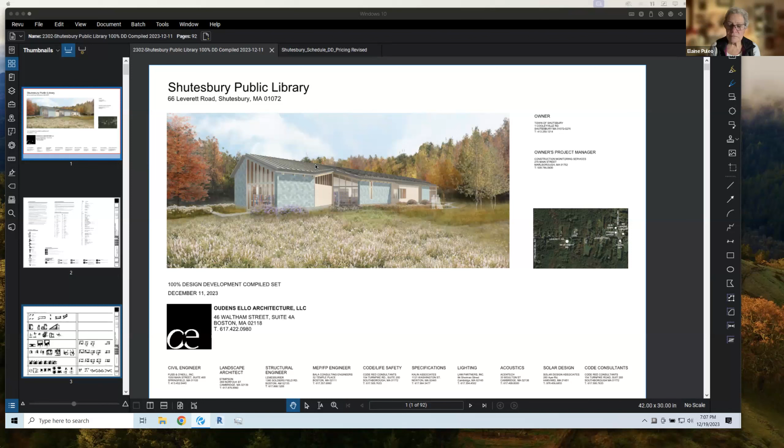So what I want to do here is really run through this page by page. I don't want to get too invested in each page, but I'm happy to stop for any questions. I expect you've all had a chance to review the majority of this, and you may have specific questions as I get to a certain page, so feel free to interrupt. In the interest of time, I want to do due diligence here, but I wouldn't want to make this a four-hour evening. So again, we have our cover page.

This includes all our consultants. The next couple of pages, the G sheets, have a lot of notation explanation, the drawing sheet abbreviations, general notes, and some code requirements. The next sheet has a lot of standard clearance, ADA, spatial requirements and clearances that we need to make sure we adhere to throughout the project. So that's something that we incorporate.

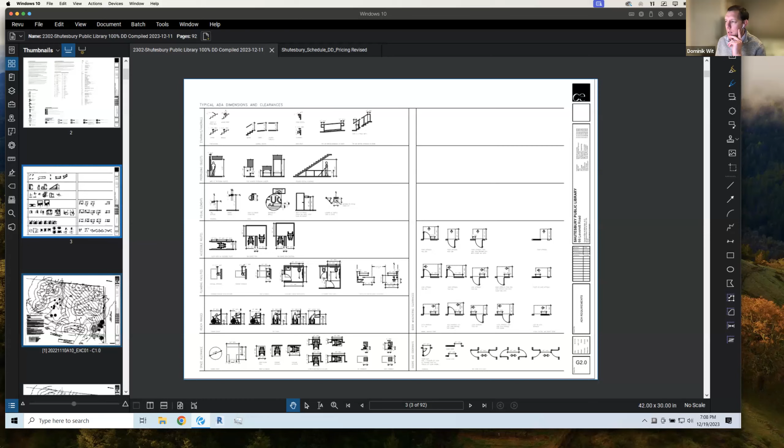The next page is the existing conditions plan with the limit of work line delineated. And that also includes straw wattles, which help erosion control downhill from the site. We also have sediment, a silt sock boundary around the limit of work, to contain erosion and make sure that any work going on doesn't let sediment run off during a rain event.

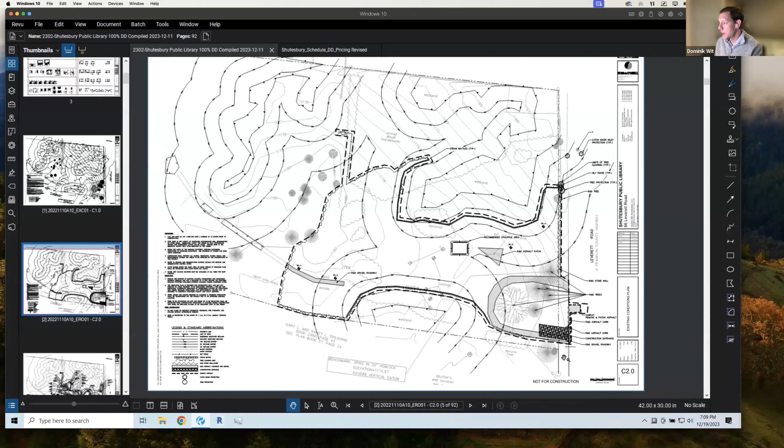We've also got a recommended stockpile area here, which is kind of where materials brought onto site, specifically landscape materials, are stockpiled and controlled. We have a construction entrance outlined here.

Now going into the site grading drainage plan. This has been tweaked a little bit from when you last saw it, but basically we have Leverett Road to the right. The entrance driveway has been shifted further to the east.

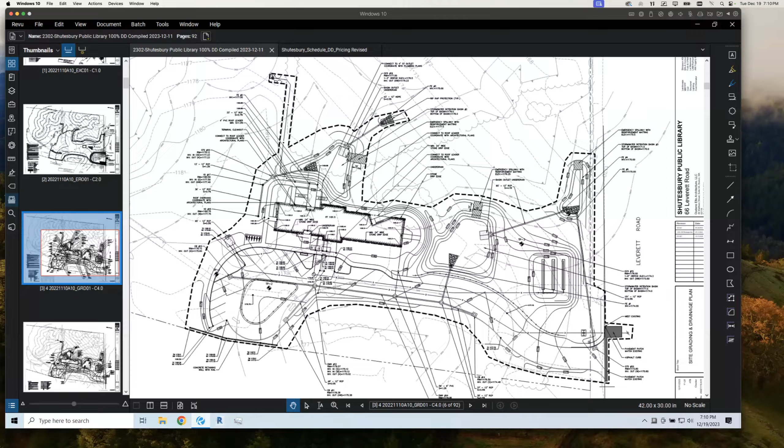So we have the entry drive that is negotiating the septic field, leading into a turnaround. We have a drop off here to the building. The stormwater management plan is really working around two major basins.

The intent here is to capture water from the site into a few drains. As I have my cursor at the higher level of the parking lot, it's going to be captured and then siphoned down to a level spreader into this basin. From there, it's going to be caught and drained off to this lower level spreader where the intent is really to control water and distribute it back into the wetlands and this portion of the site slowly. We're looking at capturing water at the entrance at Leverett as well and bringing it back to this drain I'm highlighting here.

Moving to the west side of the site, we have the well located on the western side here. Water that's captured here is going to be caught in this basin. There are some entry points to collect water at this location, and then again controlled and discharged at this level spreader here. The roof is also going to collect rainwater.

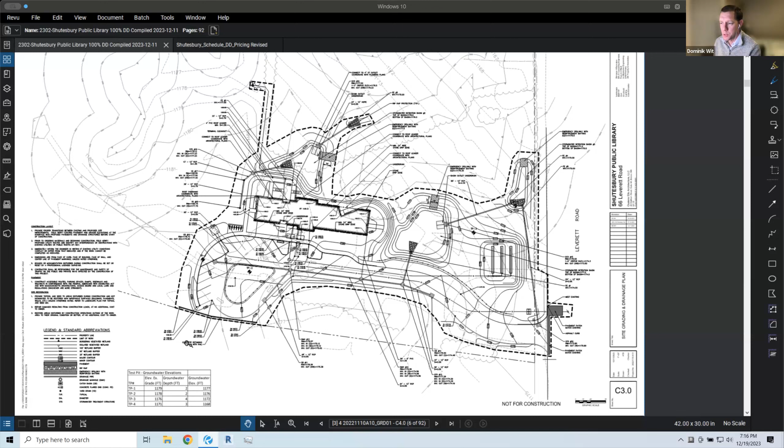Dominik, before you go on—one thing to mention about that retaining wall on that edge of the property: based on the size of the building, we think we're actually only obligated to provide 12 spaces to meet the 1 car for every 400 square feet. So we're currently showing 13, which means if we eliminate that last space, the easternmost parking space...

We think we can tighten up the overall driveway radius and pull further away from the property line on that side, or at least that would be our goal. I don't know if that's enough to eliminate the retaining wall altogether, but we would look at grading there to see if there's enough room to do that rather than having to build a small wall. There's a lot of expense in that wall.

I noticed it's got 5 feet of foundation buried under it, a lot of steel in it, so I would recommend getting rid of that space and doing what you're saying, Matt. Yeah, and that means we lose that space, but I think we can tighten up the driveway. Whether that's enough to get enough distance to get the grading to work, we'll have to see.

Hopefully it is. I don't know if you guys have talked about that yet with Fuss and O'Neill, but—yeah, it had been mentioned with Stimson, the landscape architects, and Fuss and O'Neill, as a strategy to relieve the need for that retaining wall.

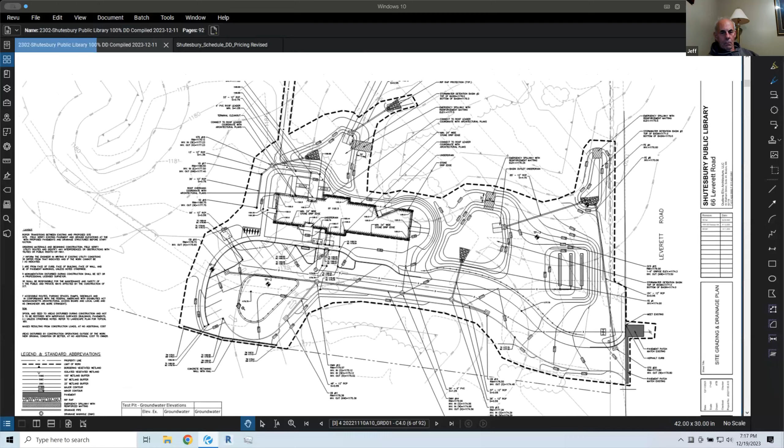Moving on, so the next plan is the site utility plan. We're seeing some of the same elements here, but this plan is outlining how the utilities are going to be brought into the site. We had two utilities priced: one was an underground conduit duct bank, which would bring electrical and telecom into the building with a below grade duct bank, and the second add-alt is to go with overhead poles.

So we would bring electrical and telephone in with overhead wires to the transformer, and then from there into the building. What would be the route if it was overhead? Overhead, we would bring it across to the east side. Got it. Yep, and I think we may need a pole—we still need to work out what that would look like, but the intent would be to bring it over to the east side to free up this side of the drive, walkway, and parking.

So that's really it for electrical service. You can see the limit of work captures what we'd need to tie in to the existing utilities across the street there.

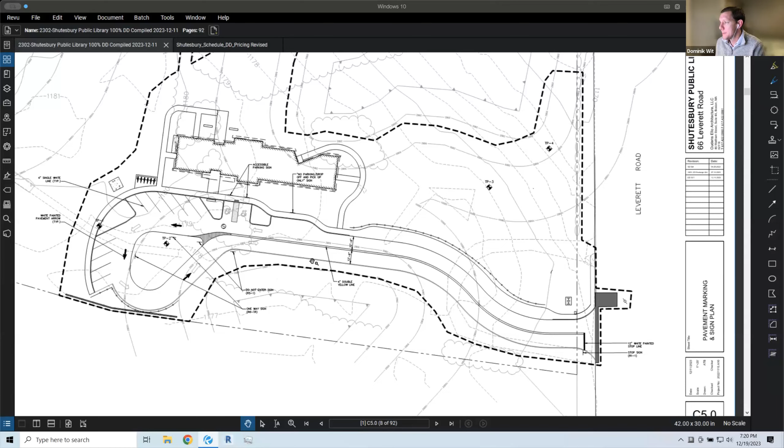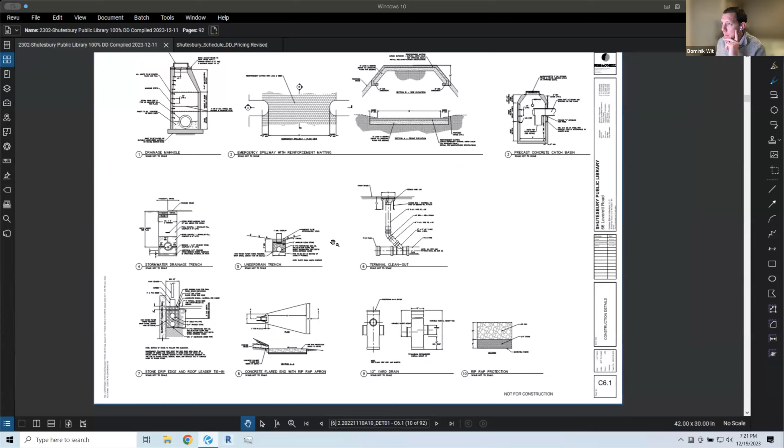This one I wanted to quickly highlight—this is the emergency spillway. Again, this is reinforced matting you'd see in the general vicinity of the basin on one side, where the water would spill over. And again, this will be overseeded.

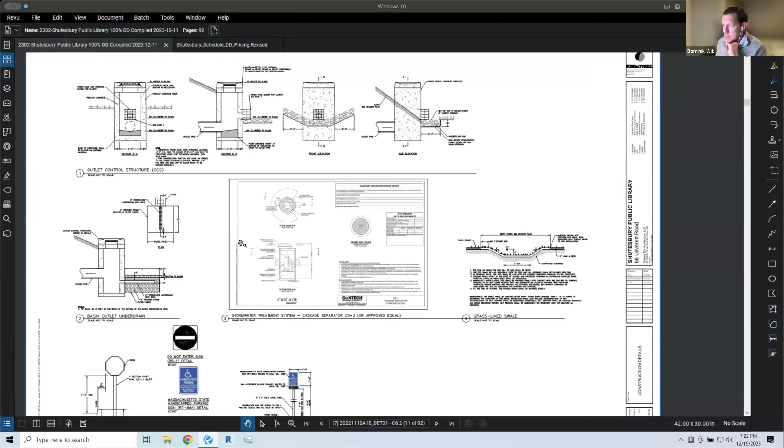The next detail page has additional details with outlet control structures. These we'd see at the basins where we collect water and then divert it to the level spreaders beyond the basins. I wanted to highlight this stormwater treatment system—we have it in two or three locations around the site, required because we're near wetlands. It's a sediment control device, like a manhole but with a filtration system inside. Because of the soil types on site and the surrounding wetlands we're discharging to, we need to clean the water and control sediment.

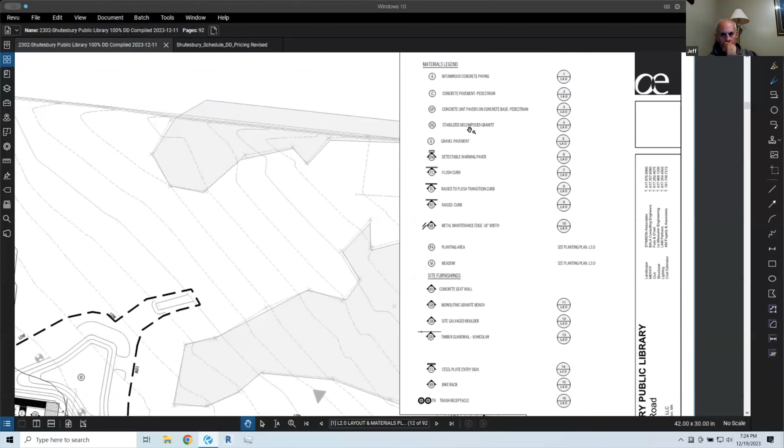That concludes the civil. Moving into landscape—this landscape plan really highlights materials: asphalt for the entry drive, concrete pathways, gravel for the entry walkway, and spillover parking with concrete block paving, and some fine grain gravel here—decomposed granite, so stabilized gravel or dust. So this is more the hardscape definition.

We do have a vehicular barrier required because of this retaining wall. This is an added cost and an additional element to the site that we may be able to remove if we can finagle this portion of the plan.

Moving on to the planting plan. Can I ask a question? Sure, can you blow that up again?

Around the back side of the parking, where it's kind of a half circle, is that a concrete sidewalk? Yes. Do we need that? We do, for accessibility—though you could do crushed stone instead. Maintenance is a consideration in the snow. We'll need ADA access to every parking stall. Could it be asphalt instead of concrete? Yeah, it could—that's a good question, we should ask our consultants. I'm just thinking about Norwell or Eastham, for instance—we don't have a sidewalk along the perimeter of the parking lot there. There's just an accessible path on the asphalt parking surface itself, so you can get from your car to the front door. To Jeff's point, we could probably simplify and eliminate that whole section of sidewalk and just have people walk on the driveway—it's a pretty low traffic spot.

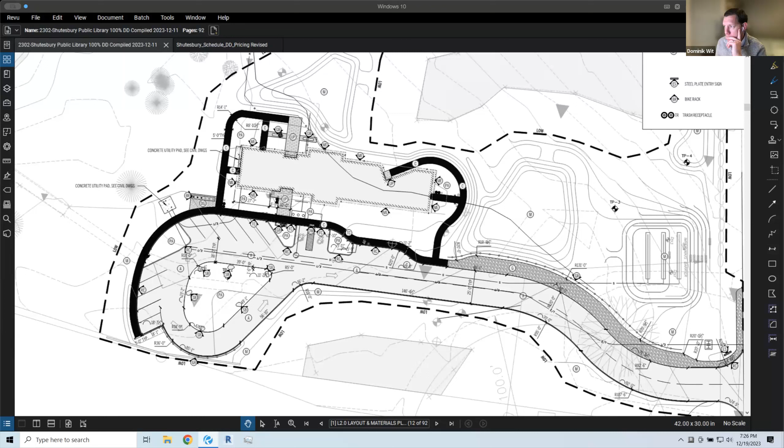But I would think we could probably eliminate some of that, if not all of that—potentially this, what I'm highlighting here. Yeah.

And are you blacktopping all of this? Yes. Yeah, asphalt's going to be the most cost-effective and easily maintained surface, I think, for you guys. It's plowable.

We've looked at pervious asphalt on projects, and typically it gets ruled out because of maintenance concerns. It has to be vacuumed at least once a year, otherwise the pores in the asphalt clog up and it basically becomes impervious. So asphalt tends to be the most effective and reasonably priced surface, and it meets ADA accessibility. That's the other thing—the lot will have to be accessible.

I also wanted to mention that we have a precast concrete curb. We do need a curb edge on this eastern side because of the way the stormwater is working, and grading and drainage needs to sheet to the east. So this is another element that we've included here, and we're looking at alternates for what that could be potentially.

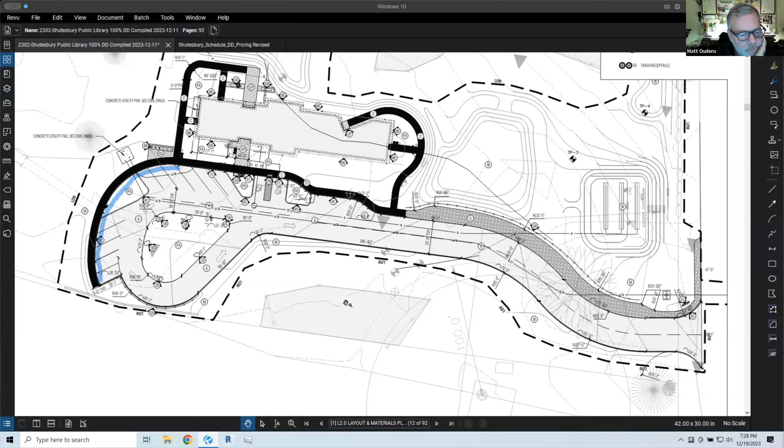We were holding on to granite initially, but that's a high spec material, so we've knocked it down to precast concrete. But potentially there are other ways that we can do this as well—could it be a Cape Cod berm? That's right, that's one of the things we're considering. Cape Cod berm is a little more vulnerable when you're plowing, but unlike precast or granite, it's relatively inexpensive to repair too.

So moving to the planting plan, starting with the grasses, we have 4 different types: New England wildflower mix, New England restoration mix, woodland mix, and a warm season grass mix. And they're distributed in different zones.

A key note here is that the retention basins are not able to be planted with any woody vegetation, so no trees or plantings, because they start to affect how the stormwater works. So these basins will be disguised—the modulation of the grading will be disguised with the grasses. I think maintenance will require mowing twice a year of these.

And then throughout, we're looking at planting trees, natives throughout, some screening happening here on the east side, some screening again of the septic field, and then trying to meet Conservation Commission remediation or mitigation strategies here.

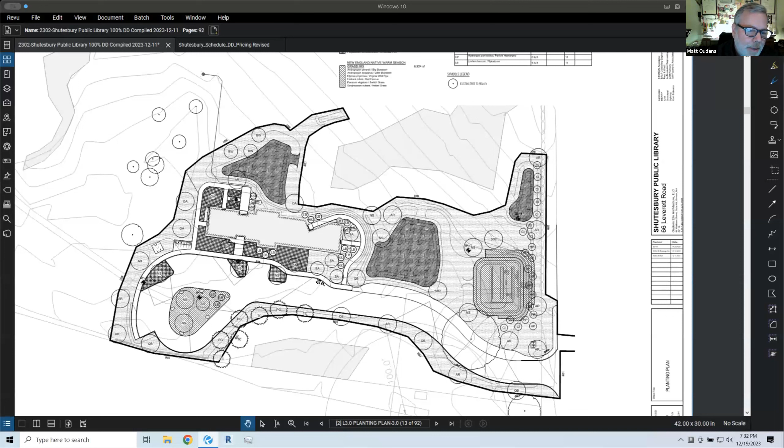One thing just to point out too, graphically, this drawing, because of the limit of work line, it sort of reads like there's a very strong division between what's being planted within the limit of work and what the vegetated condition is outside that limit of work. It won't be such a dramatic change—this makes it look like this is all very elaborately handled, and then beyond that it just drops off. I think the idea is that line blends, that the grasses planted in the limit of work area blend in with the buffer around the wetlands, so this is maybe a little bit of a misleading drawing in that sense.

So moving on, some details here, pretty generic conditions of how to treat new plantings—you need to excavate down to a prepared subgrade and then introduce compacted soils to facilitate establishment of the different plantings.

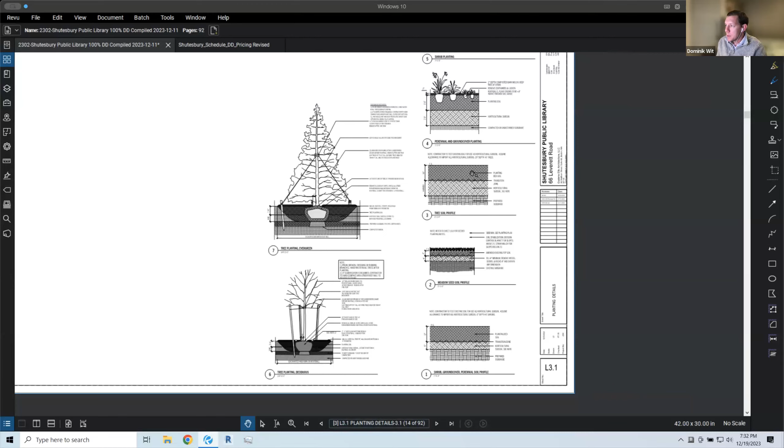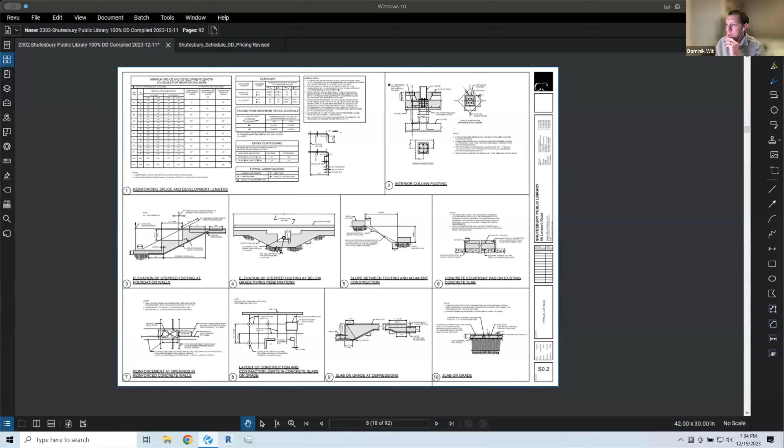Footings and foundation details. We will have a couple of pipe penetrations through footings for water lines, some of the utilities as well coming into the building below grade. Footing design.

And then we have some structural wall details here, ensuring that the shear walls that we have are constructed in a certain way. Some connection details.

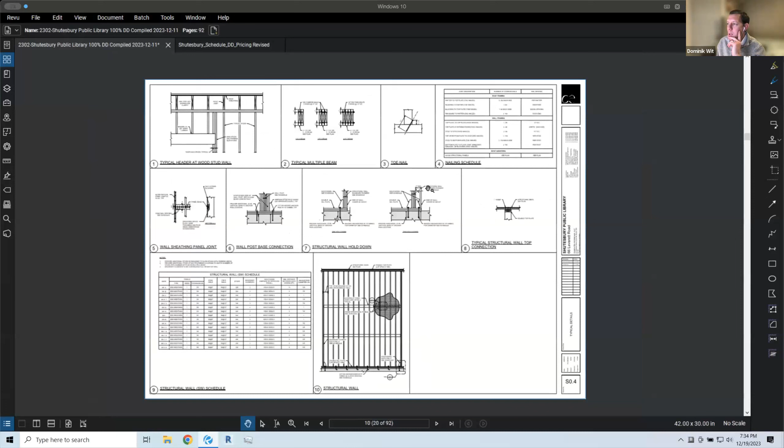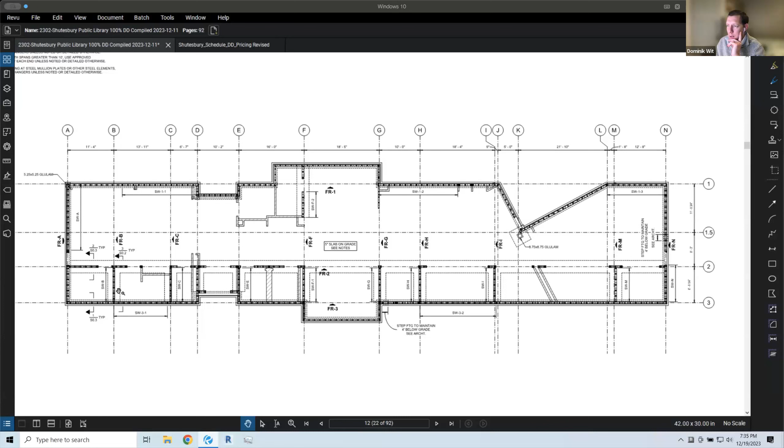The next plan is the wall framing, so you can see our shear conditions. Grid line 2 is really the spine of the building. This wall is a shear condition. We have some openings within that wall that are going to be spanned with LVLs, so we own some LVLs there for those spans. We have perpendicular shear conditions that are generally held on this eastern side of the building. This is also a shear wall here on F line.

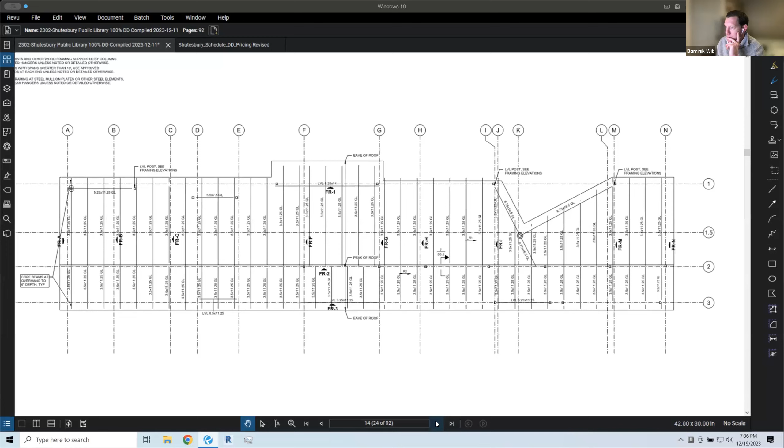And then roof framing. We have glulams throughout the ridge condition, which is the top portion of framing, and everything. The gable is framed off that. You can see some of the column conditions that we have here. And then we go into some column connections.

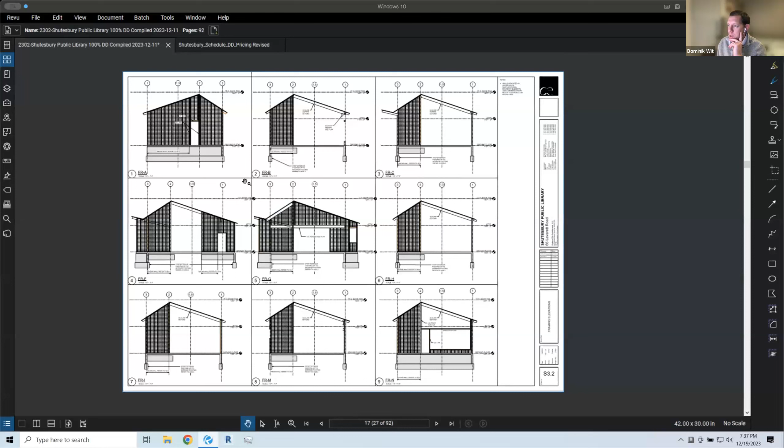Here we have some elevations. I'll kind of fly through them again. It's really outlining the framing requirements for the shear walls. You read the gable profile here and the framing requirements for different conditions throughout the building.

And a structural detail of the upturned roof. So again, these rafters are going to bear on the exterior envelope shear wall and tie into the roof rafter coming down that's holding the gable roof. The back span will bear into that shear wall running along grid line 2.

So moving into architecturals, not a lot has changed here. We did try to add and hold additional detailing. I think millwork, we really tried to kind of put a bit of work there and own some scope. But generally from our last review, there has not been a lot of revision here. So I'll try and fly through these a little bit.

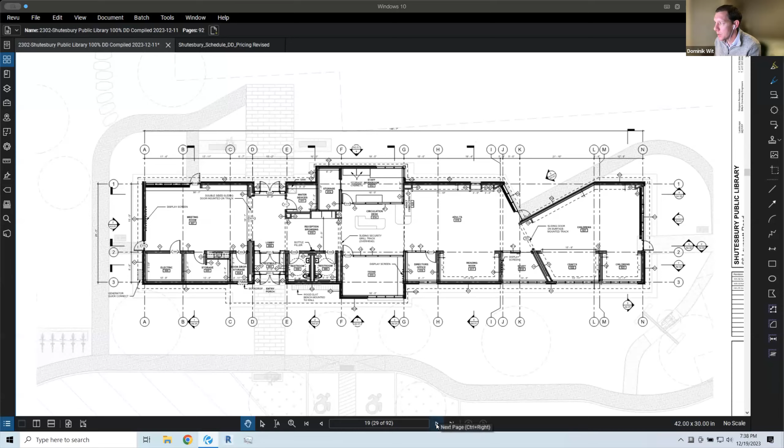I think you've got some contradictions on this drawing versus your reflected ceiling. So just check that over later. Sure, okay.

I think that will be the next. So we have roof and then RCP. This is the roof plan showing the zones for photovoltaic.

We're going to have a metal rain diverter at this notch condition, so that's going to collect rainwater sheeting down and off to either side. And we'll have the drip strip from the M grid line to the N, and then also between G and J here. We have 2 downspouts with a gutter condition, controlling rainwater to a couple of exit points here. We have that lobby exit and the meeting room exit.

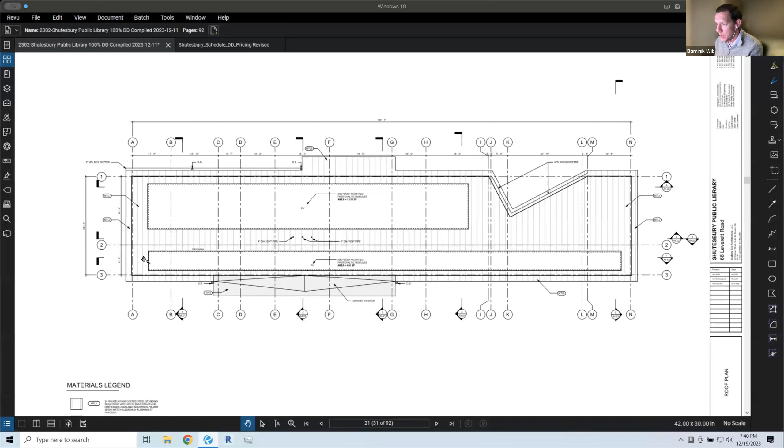Continuous PV zone on the eastern roof with the upturned roof. We have crickets here, cricketed roof insulation to divert water left and right to these downspouts.

This is the finish floor plan. So here, starting from children's, we have

resilient flooring in most of children's with a carpet inset. This can also be a carpet overlay, but we wanted to own some carpet here for the reading space in children's. Study also has resilient flooring. Adults, reading nook and directors has carpet. Teens and staff workroom and storage has resilient flooring.

And then we have tile from circulation desk, circulation, reception, browsing, library of things, and lobby. Restrooms have tile. The vestibule has a walk-off mat. And then we have resilient again in meeting room, storage, and book drop.

We will finish the concrete and electrical and water service. Yes, Brad.

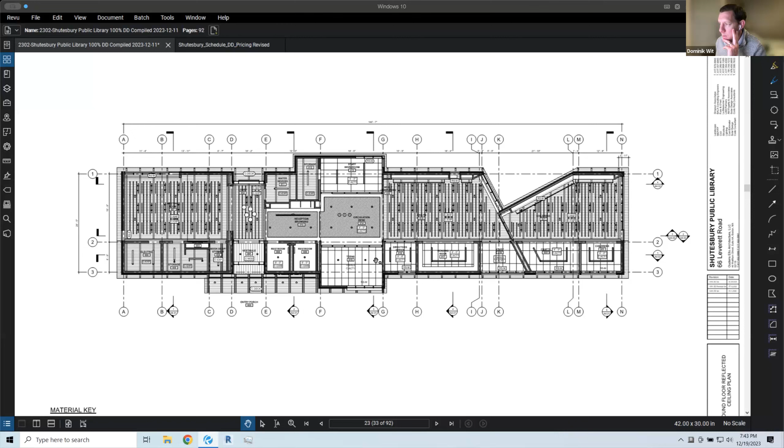In most of these zones, we have drywall, hard drywall in the restrooms. Again, teens and the study room will have a pitched wooden ceiling. The vestibule will also have a pitched wooden ceiling.

And then we have open to structure in these ancillary spaces here, electric, storage, and book drop. Didn't feel the need to have a ceiling there. We don't need it for code. Similarly, in water service and storage, open to decking above. The staff workroom will have acoustic ceiling tile.

You can also see here the acoustic baffles that take up the structural bay, so they run parallel to the structure. And in addition, we have track lighting.

So we're starting to represent here an own scope for lighting. We have track lighting in these open exposed ceilings, recessed downlights in reception and circulation, some linear in these other spaces.

The meeting room, we also have some wall grazing, articulated lighting, and we are owning some decorative suspended fixtures in the lobby. I think Brad has a question.

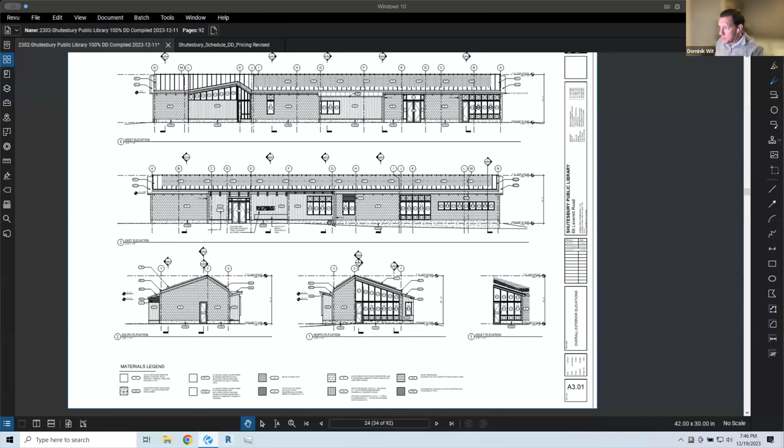Metal standing seam roof, and there'll be metal trim associated with that roof edge condition. Exposed wood decking, underside of eaves.

And the water table condition is concrete faced insulation, which continues around the whole envelope. You can see here the composition of windows and which are operable. We have awning windows throughout, giving the user flexibility in all rooms for natural ventilation opportunity.

Dale: So would Pella or a similar company be able to supply all of the windows for this project, or will you be looking for multiple suppliers on just the glass itself? All from Pella, including the vestibule. So the vestibule doors, all the door exterior and door conditions will be Pella as well.

And so in what color are you thinking of cladding this stuff? We are currently holding, so Pella is our basis for design, and we're working with them on an aluminum clad wood system. The interior would be wood, we often like a lighter maple finish on the interior, and the exterior will be aluminum clad. We're still working through what color choice we go with.

Yeah. This page is... they are... this page is taking a second to load. Hang on here. Oh, it woke up, apologies. This must be a heavy page.

I may switch to a different presentation program. All right, there you go. It's all the hatches, probably. Yeah, hopefully it's just this sheet. I have this set on another program ready to go. Hopefully it plays nice for a second, but I'm ready to go with another program if we need.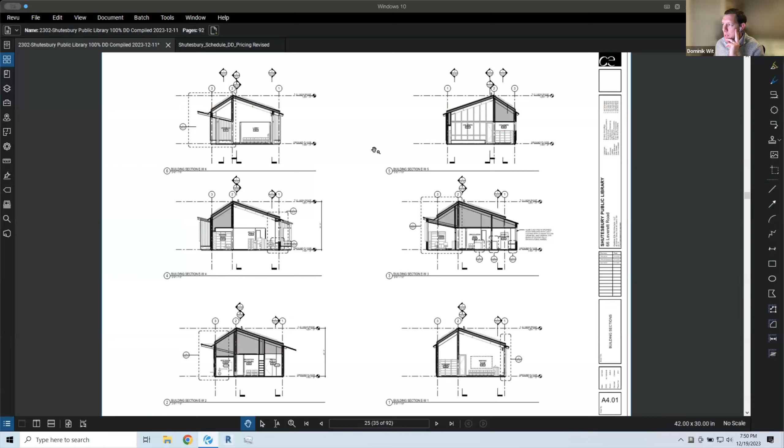So again, you have multiple sections through east and west, from the vestibule, moving to adults. Here we have reception, and then a view of children's above, which is taking a second to load. I wonder if it's just these two sheets. What I might do is switch though.

It's going to draw it for us. Yeah, okay. Can everybody see that? I've switched up. Yes. Sorry, I wasn't patient anymore.

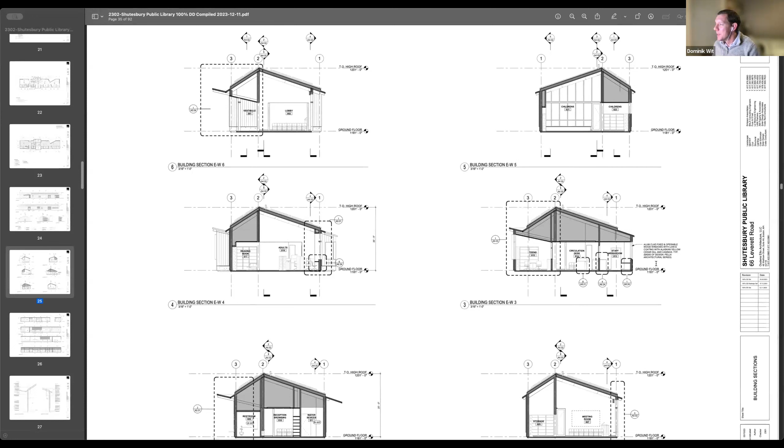So I just wanted to quickly show you teens here so you can see the relationship of the upturned ceiling condition, which matches the entry roof.

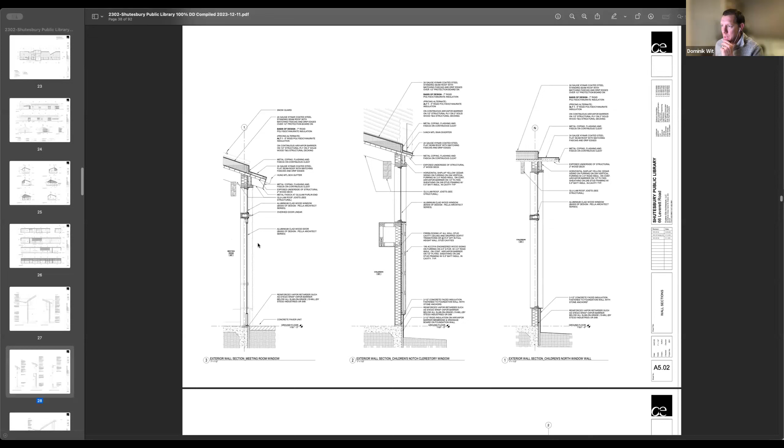This one on the left is through the meeting room. So this is going to be floor to ceiling window condition on the west side. This is the children's room where we have a shelving niche condition with a clerestory window. This is at the building at the notch condition here. So the relationship of the head of the window with the relative structure and how this all finishes.

And then another one at children's. This is the north wall of children's. This is a section through teens.

Yes, Stephen. Yes, so the section through teens, I was looking at that closely, and I'm trying to understand how the reverse roof section is insulated to be, say, compatible with the rest of the insulation. You've got the 7 inches of rigid coming down, and that stops. And then I'm not seeing much additional insulation.

Yes, at this location here. Right, yep. We're still reviewing this with Bala to make sure that we meet all the requirements here. So this is something that we're still looking at.

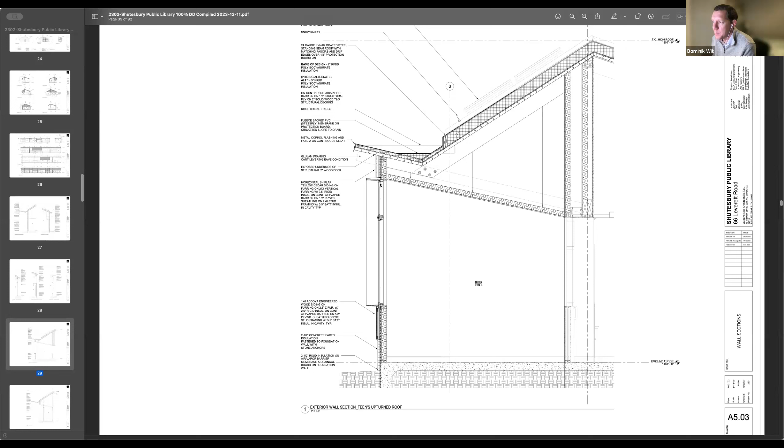This is the vestibule section. You have the outer door and the inner door to create the vestibule. We're finishing the ceiling with an upturned condition that's matching the porch roof, the upturned roof that you see here.

Can you review the amount of insulation you've got in there? You're running all your water piping through that cavity above those doors, and I'm concerned about that. If you look at your plumbing drawing, that's where all your... we had a problem at UMass where we always froze the damn pipes right through there. Yep, no problem.

That plenum space is gonna be conditioned the same as any other space that's under the roof, right? The thermal envelope is the roof and the walls. So anything below the roof is gonna be the same kind of thermal condition, whether it's in that space or out in the public space, from a thermal performance standpoint. Our concern was that lots of people coming into the vestibule get super cold when it's like 5 degrees outside.

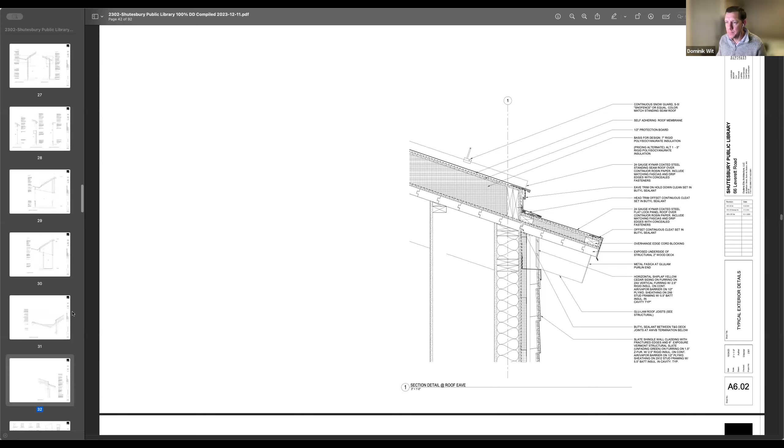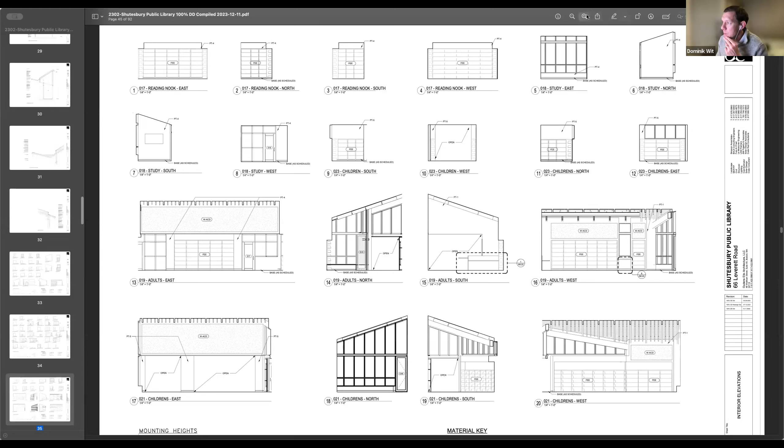We have the adults room. Some cleanup on some of these drawings - on this one here has already happened. Again, acoustic drywall in these upper portions of adults and children's. You can see wall shelving, window assemblies. This is the condition of the study carrel on the west wall, tucked in between wall shelving with a nice tall glaze condition there.

Again, just to orientate you as well, I skipped over this - we have obviously material keys down low here, and then all the device mounting heights. Self-explanatory, but we key them at the bottom of the page, and that gives you a good resource of where those need to be installed. And again, some children's spaces at the end here.

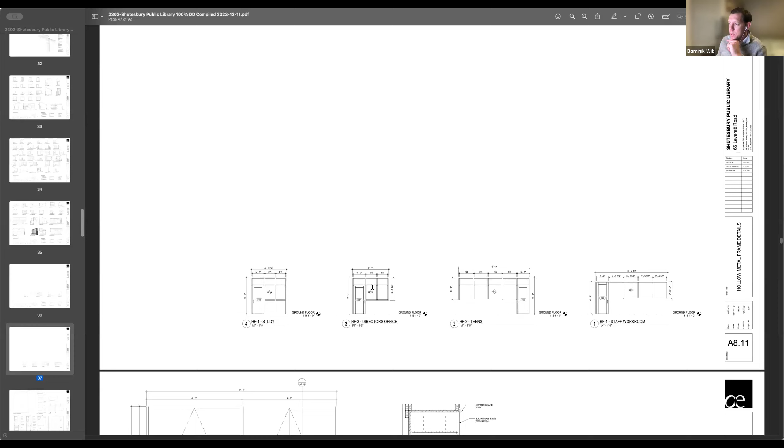The next sheet is documenting our interior glazing. We're working with Metro Wall, who we are using as basis for design here. There's going to be some revisions about where we divide our mullion system here, so we're still working through that. But we give a page specific to interior glazing.

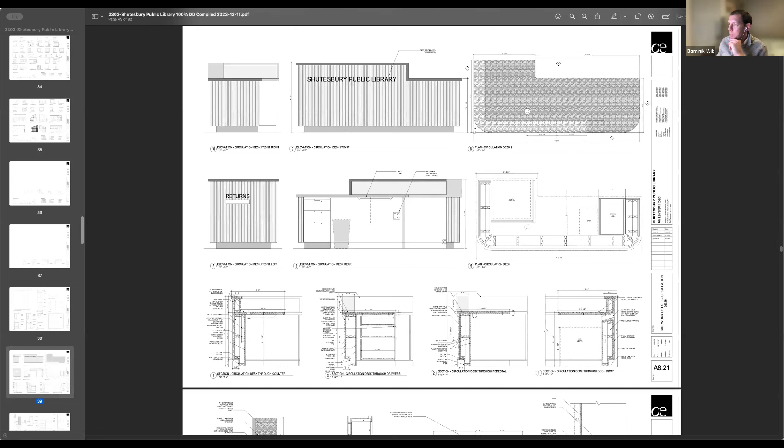The circulation desk is detailed on this next page. So this is a plan, and from that you can then refer to elevations on all 4 sides. We also have a below counter plan cut, which highlights what's happening under the counter. So on this side here, we have the book cart, and books will be able to be returned through a book slot on this side, above this book cart. That way staff can remove this book cart this way, while still allowing the staff member to sit here. And we have drawers over here.

We have a grommet currently located with an outlet below the counter. Again, Mary Anne, something we can fine tune as to your needs, so that you can have a computer station or a laptop or whatever devices on the counter. This circulation desk has 2 levels. There's kind of a privacy condition here, as you can see from this elevation.

So can I just ask one question? Well, it's probably going to be 3 or 4.

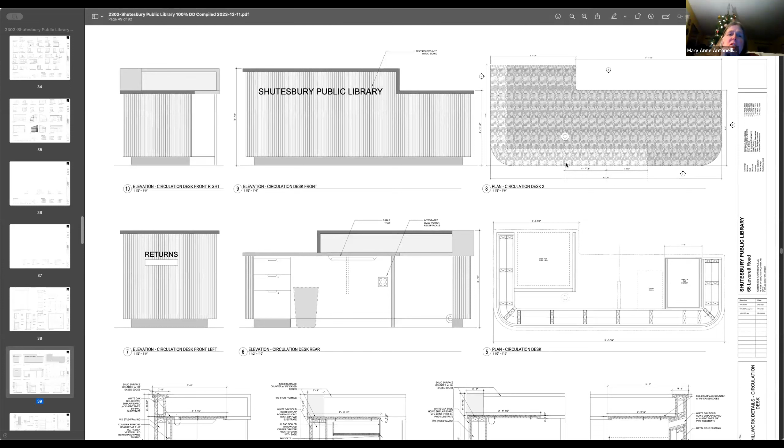So the circulation desk - people will come in and the return slot is on the side of the desk, not the front. The front of the desk is up higher at that point, and that slot could be on the front of the desk. I'm just thinking people have a hard time finding the return slot now, and if it's tucked around the side, but I guess they'll be walking directly towards the desk, won't they? That's right, yes.

I saw that Andrea had her hand up. So, yeah, I'm okay, yep.

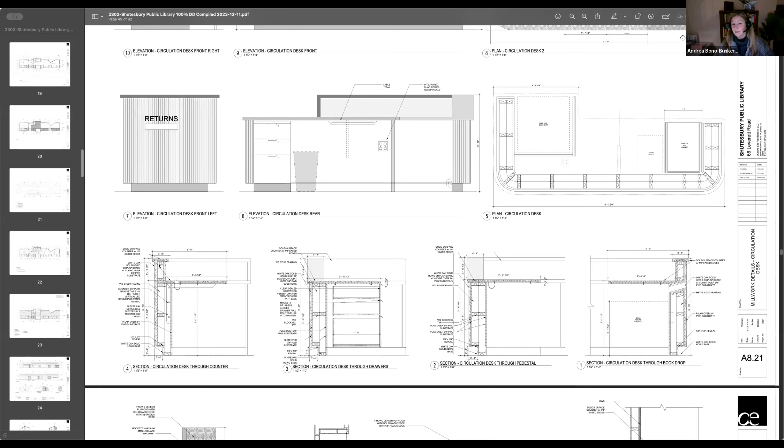So the privacy screen - is that like a lip above the surface of the counter? Yes, it's described here in this section, about 8 inches. It's an ergonomic nightmare for librarians and staff to lift books over that, so it should just be removed and be a straight countertop if possible. That sounds good, Andrea.

I just wanted to highlight that we have a low condition where we were initially thinking book transactions would happen, offering staff somewhere to put coffee mugs or pens. But we can easily revise this and have flat countertop throughout. Yes, because if they have a keyboard tray or anything on that desk and have to move diagonally, we don't want repetitive motions causing injury. So if we could remove it, that would be great.

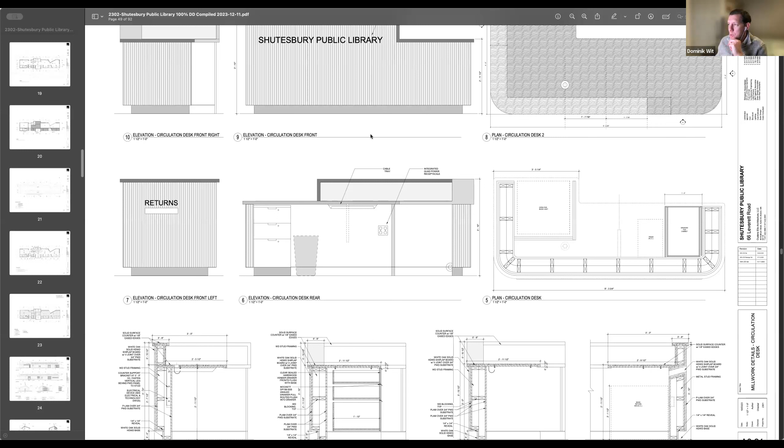One thing I forgot to mention to Andrea is that this is intended to be movable, not fastened to the ground. It won't be on casters, but it's something you can make sure to be able to move.

Moving on, we're also detailing the self-checkout station, which is next to the circulation desk. We also have a portion allocated for the print station, combined with the adult computer station - one will house a computer, the other is a flex seating station for a laptop device.

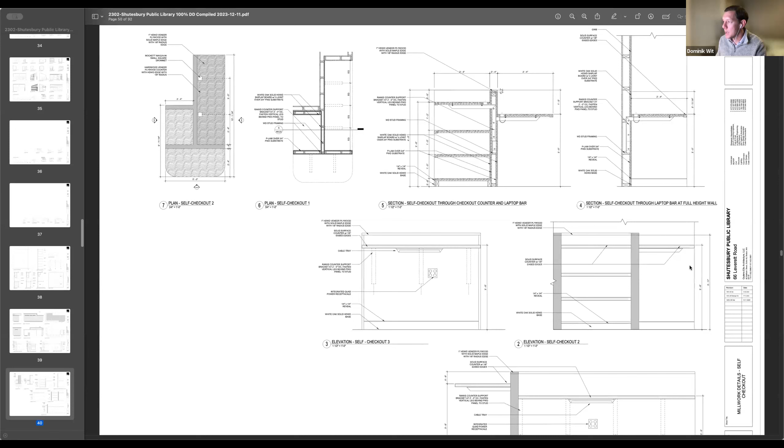Grommets - we're still working through this. I think we'll need a few more grommets here for cable management, so outlets below the counter can facilitate easy wire organization. We have storage, looking at the elevation here - this is looking at the printer station. There's a raised elevated condition, this crossing of solid gray you can see, giving somewhat of a privacy condition for people sitting at the adult computers.

Brad, I see you have a question. If you have grommets, is that to have cabling go through and be plugged in below? That's right. I wonder if that makes sense for a laptop, since laptops get plugged in, unplugged, and moved. That's right, it would be more cumbersome for the laptop station - more helpful for a stationary computer, desktop, or printer at self-checkout.

So we can revise that, potentially locate - I'm looking at the ability to do conduit runs in a back box. We don't have a lot of space; we were struggling, and I was initially reluctant to get a back box in here so we could have an outlet above the counter, but I can revisit this.

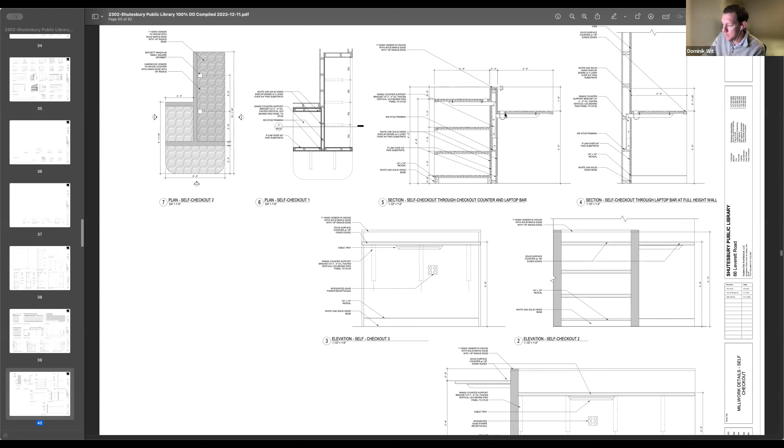So then moving on, we are detailing the library of things. I think the only addition here is we're looking a little bit more closely about how we could incorporate a coat hanger rail or rod that could simply sit in front of shelving to give you flexibility in off season.

Potentially you could remove that rod so that you have access to shelving behind. And then when you do want to display the life vests, you can put those rods back on. We need to do a little bit more investigation about what these coat rod brackets could be. If it's something that could latch in and latch out, it'd be great to remove them altogether if you're not hanging life vests, to clean up that wall. So that's kind of our thinking there.

This is all to be treated in millwork. So it looks to me like they extend out, so then there would be stuff underneath there and people would have life vests hanging over their head. Could those rods attach to the back wall so that the life vests are recessed? They could, not sticking out at all. Yep, so I think we could do that.

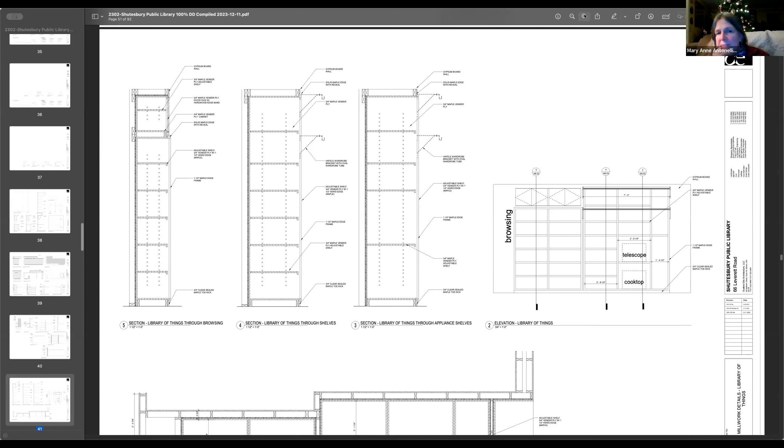I'm just zooming in here to the elevation, I think this would be an easier way to describe it. So currently they would be hanging here. The way we've detailed this is that these verticals are fixed and the shelving is adjustable so that in each one of these bays, the shelving can be put where you want. So what we might do is terminate that condition at this horizontal, and then above, we reconsider how we detail this. Potentially we have one vertical, we'll look at it, and then basically recess that rod.

Moving on. So we're kind of getting to the end of architecture. We have some exterior wall assembly details here for the different finishes - slate, wood, and an alternate stud cavity condition. And then again, interior partitions. I'm going to go through these fairly quickly.

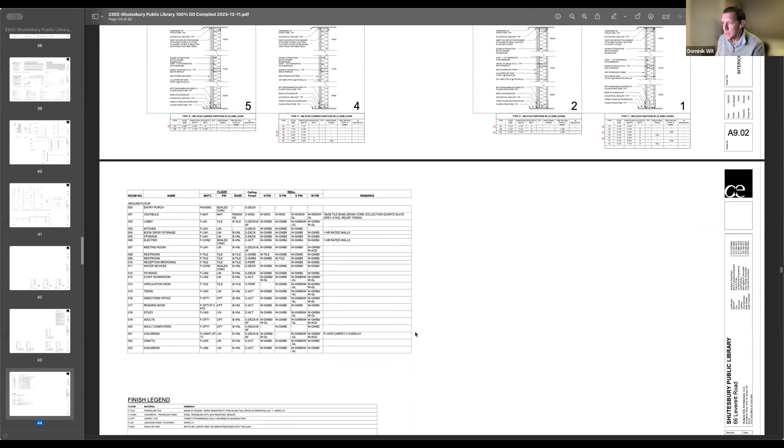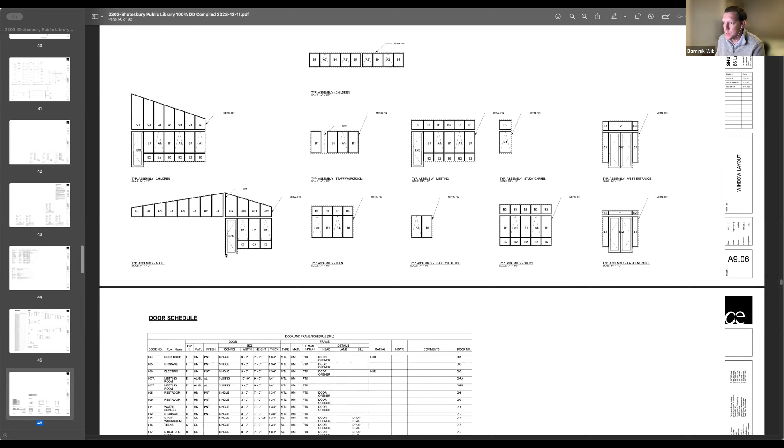The floor - we have the finish schedule, which we kind of went over already in the plan. We have details for the window assemblies, we're coordinating with Pella on all of these - how we're going to gang them together, what are the details associated with that, where we're going to have the extruded fin to articulate these window assemblies. The door schedule - we're currently working with our door consultant, door hardware consultant. That's another conversation to be had with you through CDs. Different door types that we have on the job.

Some details associated with the exterior windows. And then the furniture plan - again, nothing has changed here, we're just recording. This is not so much for construction, for the GC, but really it's a good reference for what we're doing with FF&E.

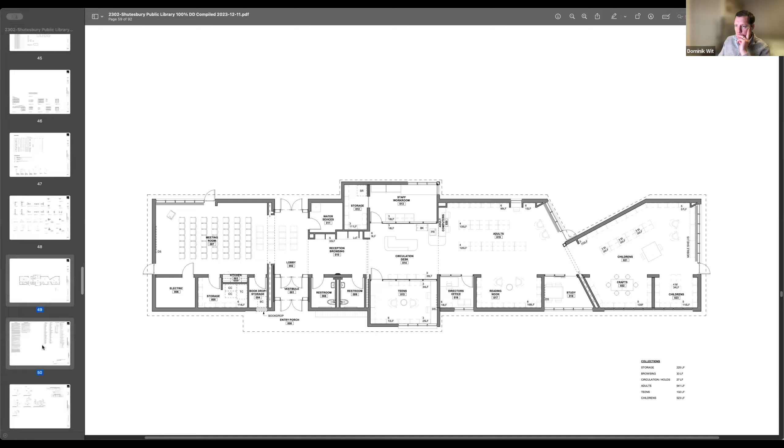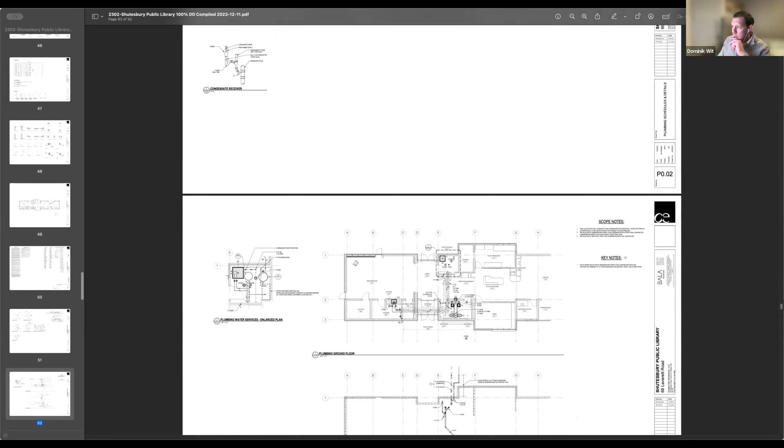And then moving on to mechanical. So plumbing, we always have the front end of abbreviation explanations, general notes, capturing some scope. Some details here - I think we will need some clean outs, and we have one floor drain, I believe. Getting into these plans, this is the predominant plumbing plan.

So the water service room here has an electric water heater. And this is ET - I forget what that was, electric tank, I'll get back to you on that. It's captured in the pages above.

So the water treatment is still being negotiated, we still have to coordinate with the well specification. Once we get that all coordinated, the water treatment will be located here. Again, it's just highlighting fixtures - we have a sink at the kitchenette, then bathrooms and a water dispenser on this wall here. This is a below-floor plan that shows you the penetrations where we're bringing water in and out. You can see the tight tank here.

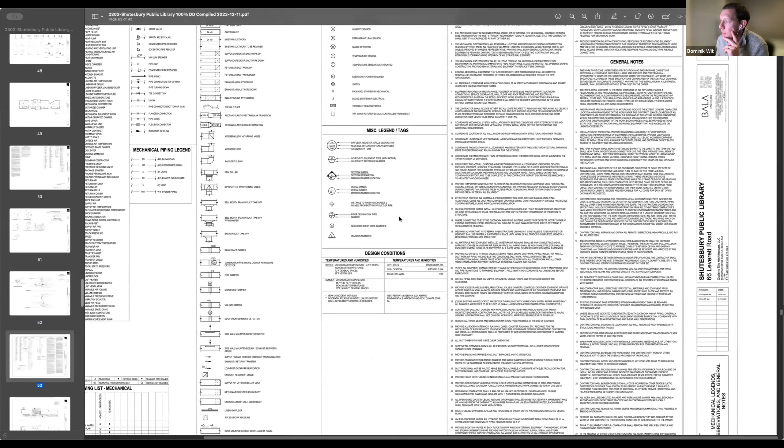Moving on, so next is mechanical. What's the tight tank holding? Septic - it's a fail safe for the septic system. So if there's an issue with the septic system, you have a septic tank as well that collects before it goes to the leaching field. But the tight tank, as I understand it, is a fail safe - if that system fails, it gives you a day or two more. The tight tank would need to be cleaned manually, you'd need to get somebody in there to pump that out.

Two quick questions - the water heater, is that a heat pump water heater? Yes. And then, I don't know the term for it, but is the hot water continuously circulating, so when you turn on the hot water at a remote location it's hot almost instantly? I believe so, I'll ask the plumber and make sure to get that to you. Thank you.

Quick question - does this tight tank, this fail-safe tight tank, meet specific regulation? Is this a requirement that needs to be met for this tank? I believe so, yeah.

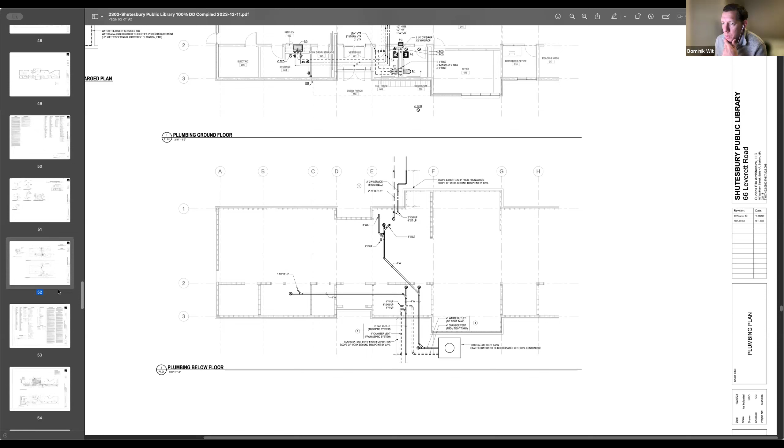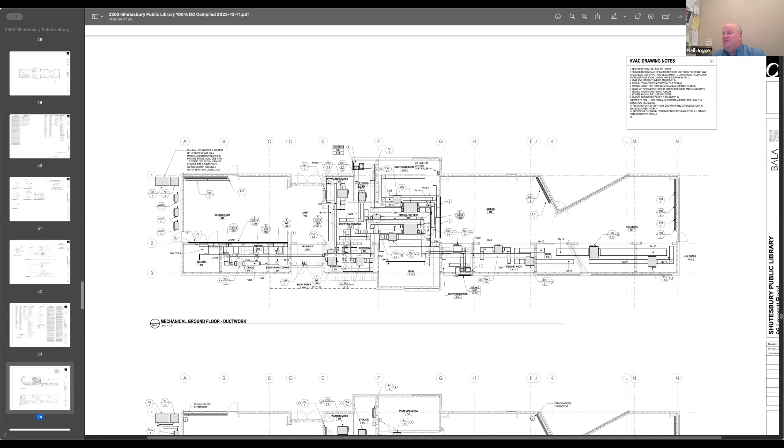We have more clearance here - that's also where we've got the most room. Seeing it laid out that way, I'm very concerned that you're not going to have the space above the ceiling for the units and for access. And below it, you're going to have access panels everywhere.

The access panels is something that's a little bit of an unknown to me, but my sense, page 64, is that this central plenum space is where we have the most room. Duly noted though, Neil - good point, and we will continue to coordinate.

What was I, 57? So here we go, 64. So moving on.

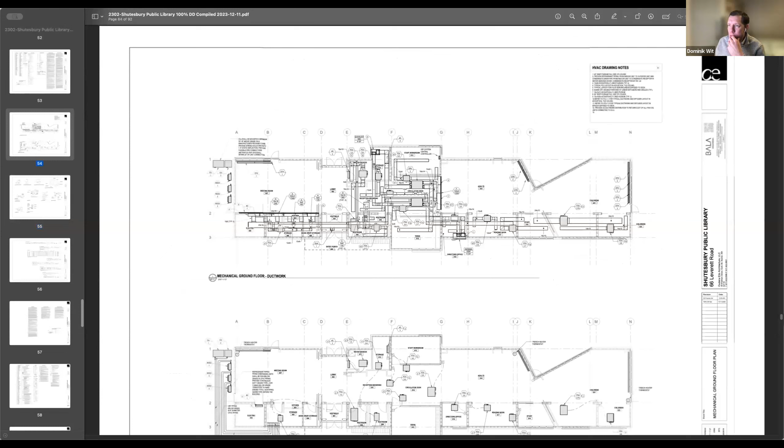Some details: we have intake and exhaust for the ERVs. We're still working on detailing those conditions. Currently we have the intake above the director's office, and we're looking to incorporate a louver system that would read as part of the window, above the window. We're looking at detailing that. Then we have an exhaust louver coming out of the south wall of the storage room. We still have to do our homework on how that's going to get detailed.

I was just reminded this is the louver detail we have, so we're still working through some coordination elements. These are mechanical details in general, just flying through them.

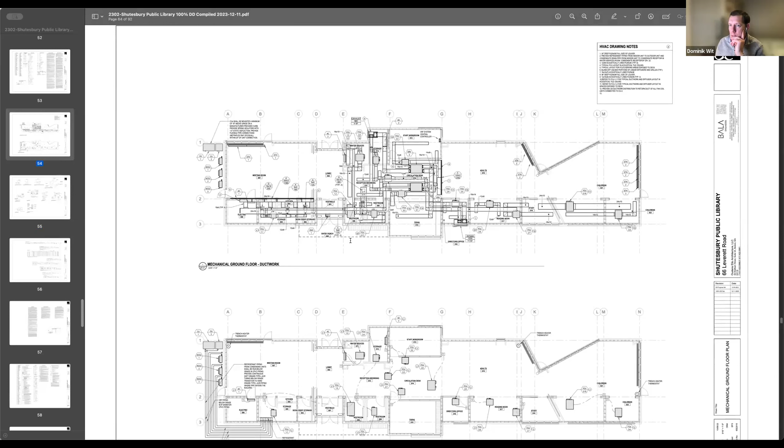Here are the schedules. Back up a sheet. Back one more. Back to these - how come you're bringing all these pipes underground? I know why they're underground, but why are you bringing them all the way around the corner of the building? Why can't you come in from the south wall? Because we don't have a lot of wall thickness to run all that.

We looked at running them through the wall. You can't come with insulation. Yeah, that would have to be exposed in the room, and we're trying to keep them clean. So instead, above the electric room from the south wall. That's what I'm asking - oh, so this way here. Exactly, yes, we could potentially do that depending on...

We may need to do a drop ceiling if we bring those in. Why? Because you're going through an electrical room. I'm not sure exactly on the code about running that refrigerant piping over electrical panels. Okay, well talk to your engineers, see what they say. Yeah, it's a good point.

We would save on some duct, right? Some, below grade. Yep.

Dominik, I wonder too if we could flip some of those units to the bottom of the page, outside the electric room rather than the meeting room, to reduce some of those runs maybe. I think we have a roll-up generator there too. Yes, you're right, and I think we also have the PV panel - we've got some stuff there that we need access to.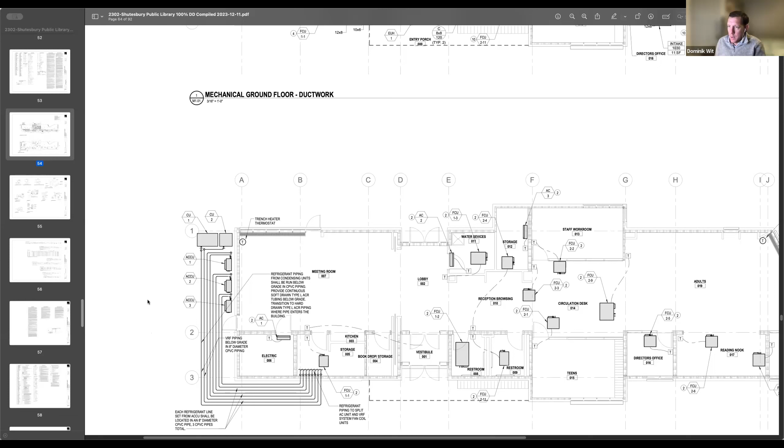Continuing on, we have some schedules of all the mechanical equipment.

Moving on to electrical, again front end of drawings. Here we're highlighting the pathway for overhead electrical service. We also have site lighting incorporated in this plan.

We've reviewed with our code consultant, and we feel like we may be able to eliminate some of these. We currently have light poles at these HH locations. We do need lighting at the parking lot, but we could potentially see some savings if we omit these. We have light bollards around the egress path - these are required by code, so we're meeting those requirements by locating them there.

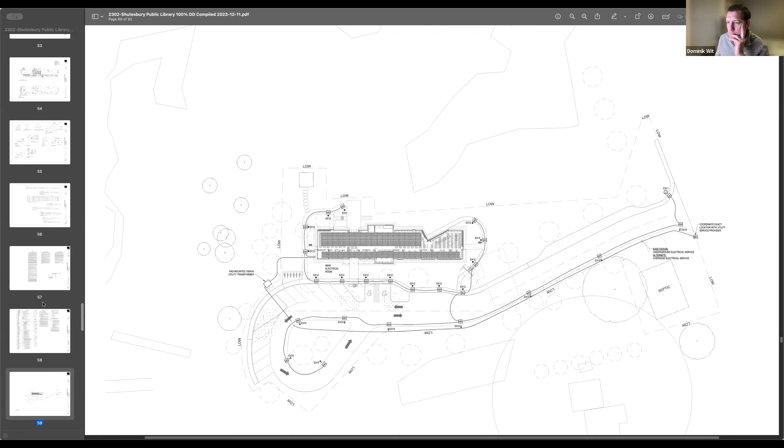So this plan really highlights some outlets. We can revisit this, Marianne - I know this was something we looked at through early parts of DD, I believe. So again, we'll continue the coordination here, making sure all your requirements are being met.

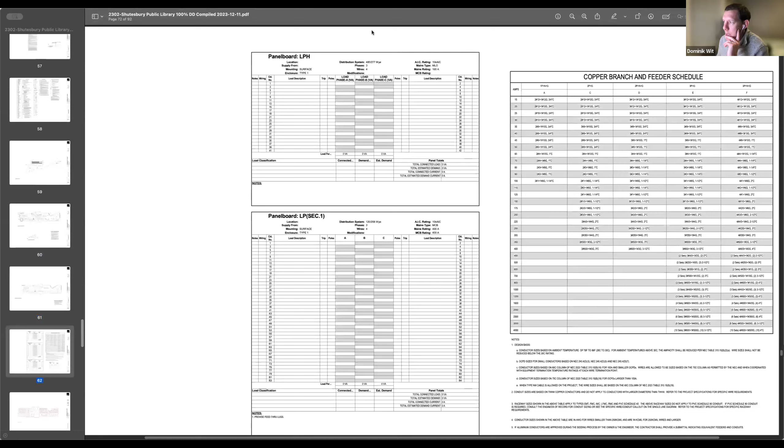This is a switch plan. Again, we can coordinate on all of this. And then we have some electrical schedules.

Then moving into our lighting consultant - this is a control plan, which to me looks like a placeholder. I still have to go over this with our lighting consultant. We took a very high level strategy, I believe, on interior lighting: public spaces to be zoned together, the meeting room is completely independent, and a lot of these smaller spaces are localized with local switches.

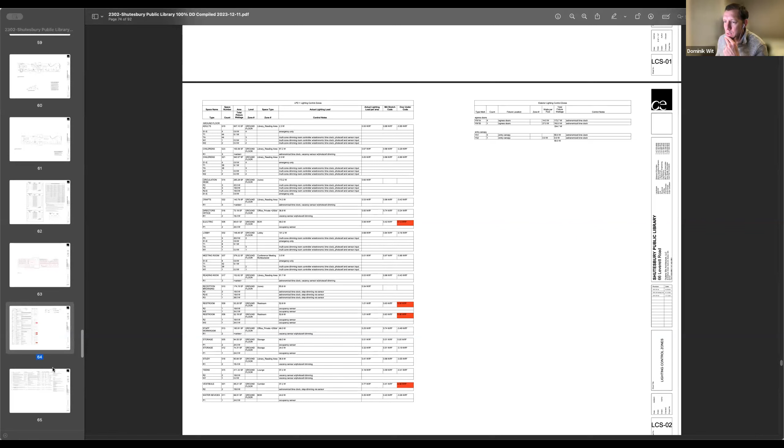Adults and children's areas would be zoned independently of each other. We're going to do more coordination here, and obviously it's something we'll coordinate with you as well. This is the schedule for the lighting control zones - I still need to coordinate on this, so we own the scope, and we're continuing coordination here.

Just flicking through the lighting plan. Again, I went through it at a high level in the RCP. Not much has changed from when Lamb presented to you. We're going to go through individual selections again, so we definitely are not settled on any of this right now, but we will continue.

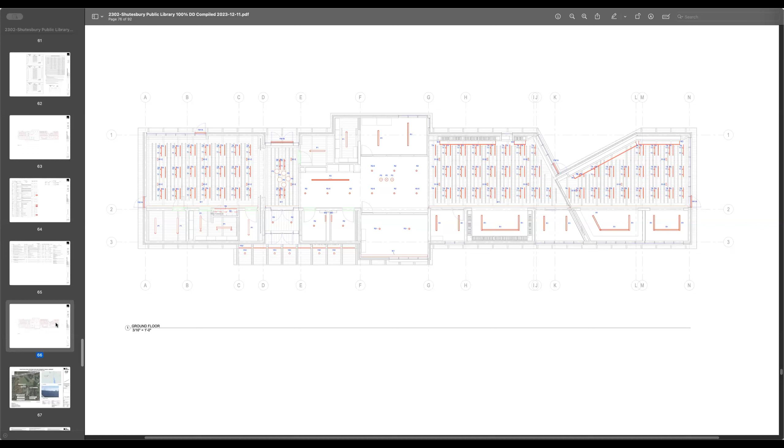Generally, the lights between the baffles are what? It's a track system, and then it's this little 4-inch LED track-mounted fixture. Is it a pendant? No, it's not a pendant - it's basically track mounted and directional. I don't have an image of it; I don't know, Matt, if I'm missing an explanation of that. No, that's right - they're like down spots, 4-inch round fixtures. The idea is that they're tucked up between the beams and the baffles so they're pretty discreet, providing illumination without calling a lot of attention to the light source.

And the last section is photovoltaic panels. There's a lot of information here.

We're able to produce annual production of 53 megawatt hours, which meets the requirements for the building.

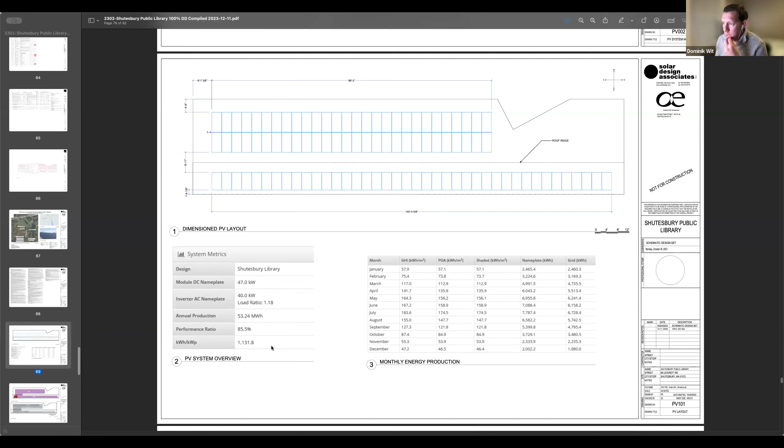You see the layout here. More layout details, some ground coordination.

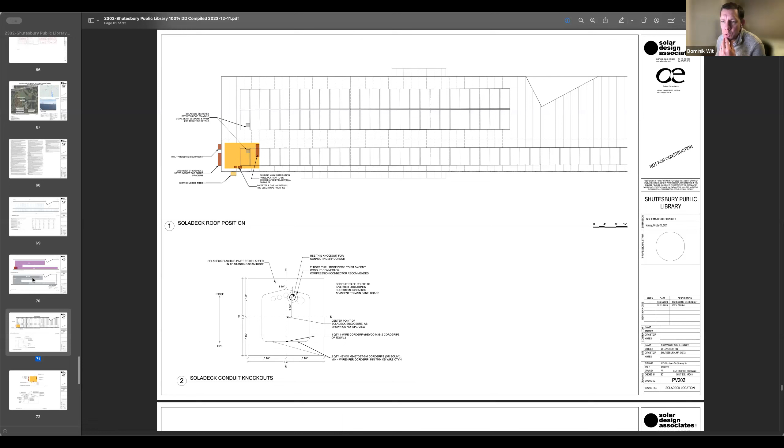When you say it meets the requirements of the building, does that mean it provides more power than the building uses? Is that net zero? I don't know what the overage is, so that would be good information to have. What's the projected overage, or where do we stand on building use?

Moving on. Some conduit run details here. This is a plan showing the structural grid that's going to hold the panels, the attachments to the standing seam roof, and the layouts and stipulations for that.

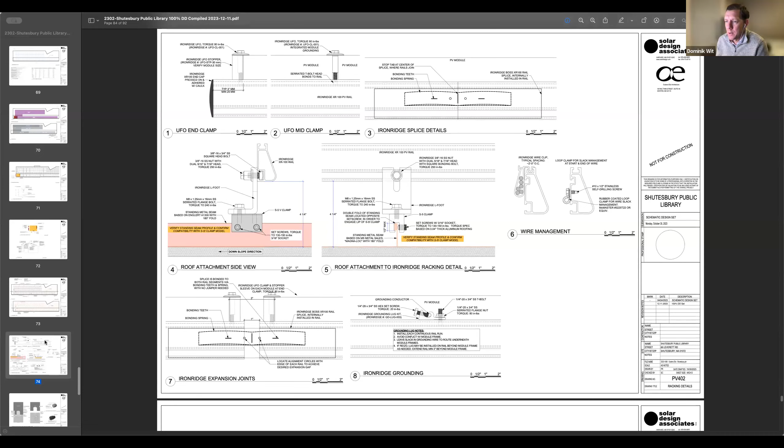Getting into the nitty-gritty here of detailing the exact connections. We're rolling these back into our drawings as well, coordinating on that. Roof penetrations - we will need 2 roof penetrations for power, I believe. So those things we're still coordinating.

Some more mounting details. And again, this is in the electrical room, what's required for the cabinets, the inverters. We're coordinating with the electrical engineer already on all of this, making sure we have enough room. Wall fasteners, connections - this is the exterior meter assembly. We still need to coordinate that with the roll-up generator.

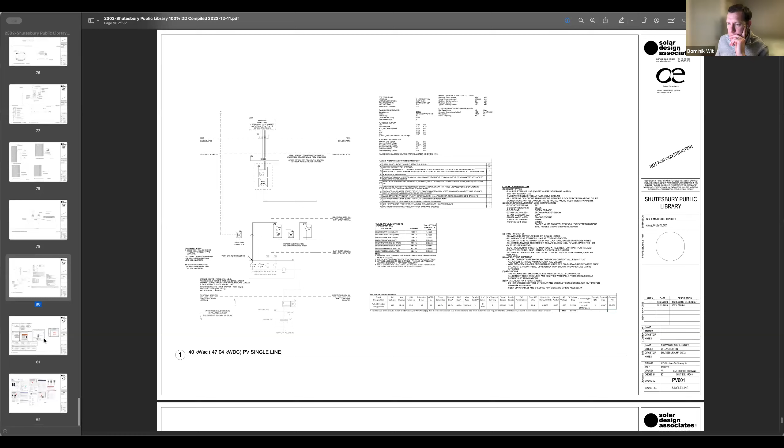And then we have electrical plans here, with some additional info at the back end. I'll race through that last section. That really makes up the drawing set for DD pricing.

In an hour and a half. Not too bad. I'd open it up to questions. Overall, it's a good set of drawings. That's a question of perspective, Dominic. Agreed, good drawings - you guys did a good job. I was impressed. Thank you.

I'm happy to answer questions as they come up as well. If you think of more - you've brought up some good questions - I'll get feedback to you when I can.

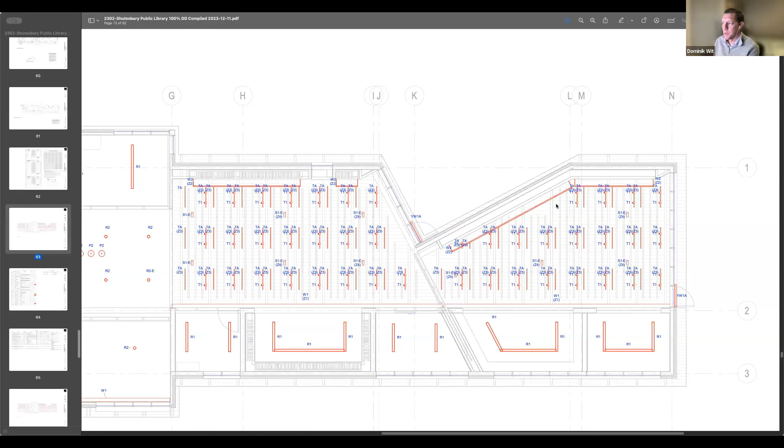Dominic, just one question on those downlights. If you recall, I think it was Mary Ann or the MBLC who expressed concern about lighting of the shelves at lower elevations. I just wanted to make sure those light fixtures are going to solve that problem. Apologies, I missed some fixtures that we do have specifically for that. So at these shelving niches, we actually have standoff linear fixtures that are wall grazers specific to lighting these niche conditions. They're installed at about - no, it's going to be lower than that - 7'6", 8 feet, something like that. So it's relatively low and directly above these shelving units. Thank you.

Any other questions for Dominic now? Penny had a question. I looked through that really long spec document that Marianne provided to us, and in that, I didn't see anything listed about the photovoltaics.

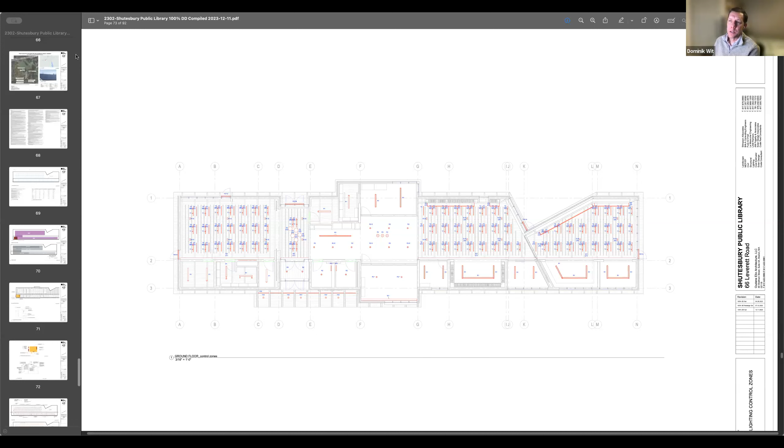Yes, so we will be getting a spec section from them for the CD set and for permitting. What we did end up getting is a very healthy drawing set from PV. You are getting a cost estimate for that, right? That's right, yeah, that is included. So for this DD set, the way Solar Design, our consultant, worked was that the drawing set - it's over 10 pages, even more, looks like it's close to 20 - is very detail oriented and covers a lot of that. But yes, we will be getting a spec section for permitting and for construction. This was extensive and all we needed for DD pricing. Thanks for bringing that up though.

Any other questions? Dominic, thank you for going through this with us. Absolutely, apologies on the delay. I'm totally overwhelmed myself. Apologies it took so long. Thanks again to everybody for your patience as we were trying to get landscape and civil together for this effort. All right.

Moving along, we're only about an hour behind. Update on the site work. Mary Ann, do you want to give the update on that?

So last week the survey crew came out and staked the limit of work and the 100-foot buffer zone, so that we could count the trees that will need to be removed during construction. The survey crew came on Wednesday, and then Elaine, Penny and I spent several hours - Greg Tizzulo from Stimson Associates helped us a little bit - but we were there for 2 or 3 hours counting trees. We measured the trees and marked them and made a chart according to the Conservation Commission's regulations, so that the landscape designer could then recommend the number of trees needed to replace those trees.

Sorry, I thought I'd flash this up so we could speak to it. Yes, I think we should have sub-design committees and continue on. We'll have a few more milestones on the design side, so we're going to have a 60% coordination set and a 90%, I believe.

So there, we need some town agency coordination and meetings. The fire department, I want to review again, police chief, so there's a few departments we still need to do a bunch of coordination with. And then as far as our cadence with you as a group, bi-weekly I guess, whether it's subcommittee and then committee, subcommittee, committee, and I'm happy to work on that kind of cadence again.

And Marianne, maybe there's a couple of very specific programming conversations you and I can have that I think we really lean on to work out some of the micro programming of certain elements, that we then bring back to the subcommittee and committee. So I'm happy to keep going on a bi-weekly cadence, if that makes sense.